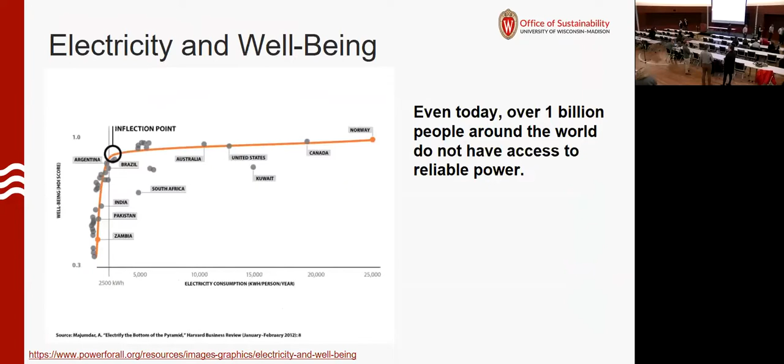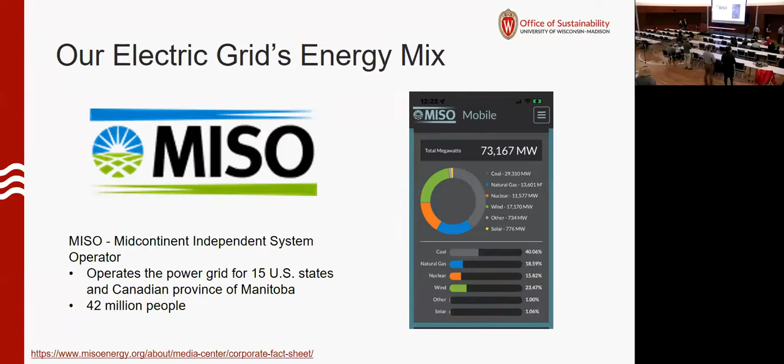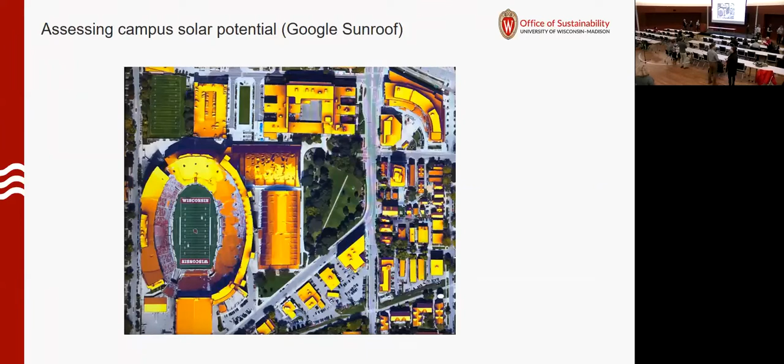Well, Andy's going to be at the panel the whole time after the initial presentation. You're welcome to join, Amanda. I need a refreshment.

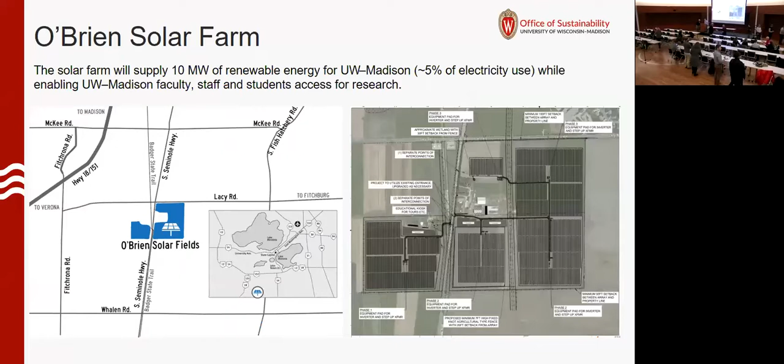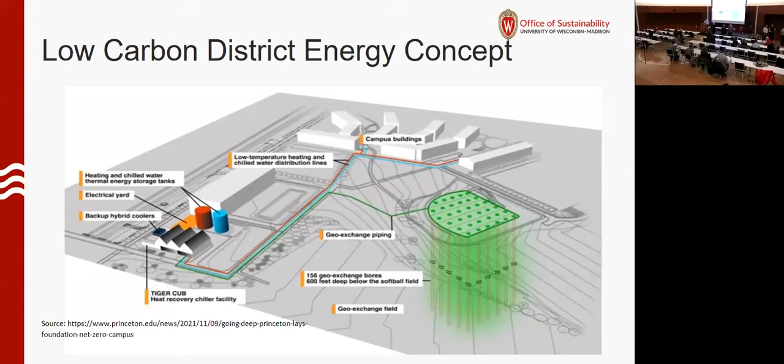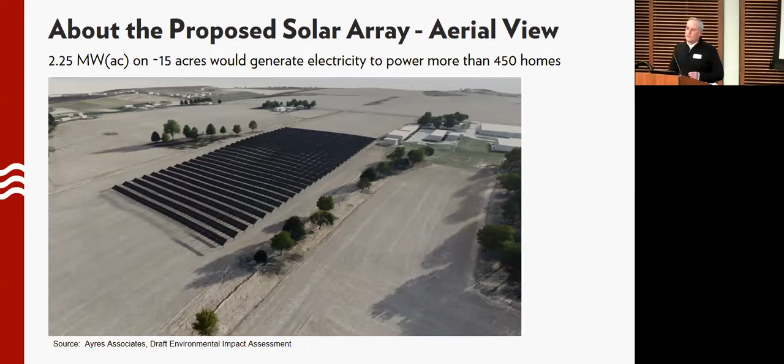The description or the image that you see here is really just the base case for this project. It's designed to illustrate the size and scope of the project, but what's missing and what we're hoping to elicit from you all here in person and listening on Zoom is how we might consider opportunities to design this array to facilitate all of the wonderful research that Professor Michael Ferris and Vice Chancellor Steve Ackerman were talking about before. So that's our mission for today. We'll share a little bit about the project and then open it up for your input and for discussion on what might be possible for this project.

As I mentioned, this project would be on the UW-Kegonsa Research Campus, and that's part of a campus that includes 280 acres altogether, including the Physical Sciences Lab. I want to send a shout out to all the folks at the Physical Sciences Lab who've been incredibly cooperative partners in conceiving this idea.

I mentioned that there would be roughly 15 acres or so that we might have to work with for this project. And the university, under this proposed project, would be leasing the land to Alliant Energy. The university would retain the renewable energy credits associated with this project.

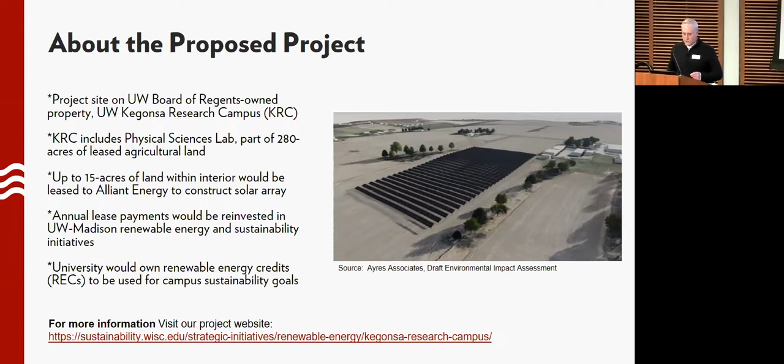And some of the outcomes that we're hoping to get out of this project: of course, we want to support our institutional mission, creating research, education, and learning opportunities. We want to make progress towards our clean energy and sustainability goals. We track those goals through STARS, the Sustainability Tracking Assessment and Rating System. Campus currently has a STARS Silver rating, and over time we aspire to continue to evolve that rating, eventually get to gold and even platinum. Solar and renewable energy projects are one way that we can help do that.

Of course, for some of our collaborators, Alliant Energy, this contributes towards their clean energy blueprint goals. And we have a representative from Alliant Energy to speak about that later on in the presentation.

It was also critical for us to make sure that we were being a good neighbor and a good partner with our local community. And that meant being in close communication with the town of Dunn and with Dane County to share information about the proposed project and to get feedback from them and learn about any of their concerns. Gary Brown will talk a little bit more about that later on in the presentation.

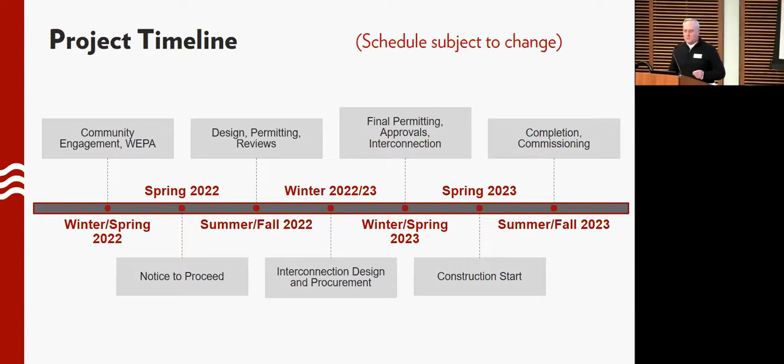We'll see how that goes. There's a lot of disruptions right now in the supply chain and other things out there that could easily throw a wrench in this timeline, but that's what we're aspiring to do right now.

I want to take a moment to recognize and thank all the people that have made a significant contribution to making a project like this happen. The university hasn't developed a solar project like this one before, and so working together has required putting new areas of communication together where they didn't previously exist.

I would like to thank all the offices on this slide, particularly the Office of Space Management, who've been critical in putting the documents together for preparing the lease. Of course, Alliant Energy, you'll be hearing from later on. Sunvest Solar, you'll also be hearing from later in the presentation. And the Wisconsin Institute for Discovery, thank you, Professor Ferris. And of course the Vice Chancellor for Research and Graduate Education, thank you, Vice Chancellor Ackerman, and all the folks from your office. But none of this would be possible without our next speaker.

Gary Brown is the Director of Campus Planning and Landscape Architecture, and it was working with Gary and his team, working with Gary's leadership, that really made this project go from an idea to the possibility of being implemented. So let me introduce Gary, and he'll tell us more about the project.

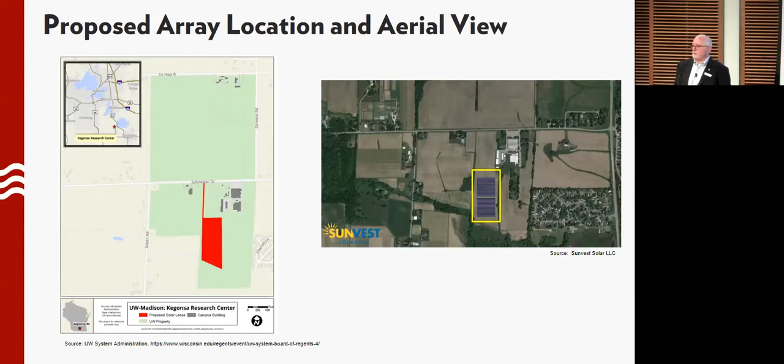There's some prime agricultural lands on the north end, but because of my knowledge and understanding of the geology of this site, just to the east is actually a drumlin left by one of the glaciers that came through here. So it's a little more rocky, a little more sandy, probably not something you'd use for agricultural lands. This south-facing slope also has some of those same characteristics. Even though it's already being used for agricultural properties, it's not one of the prime agricultural land sites that we have. It's also outside of wetlands, and we'll take a look at that in a second.

So this environmental impact assessment that we do, we spend time thinking about what the impacts could be. We actually have a scoping meeting where we meet with the public to understand what concerns they have about this type of project on this land. We heard some concerns about impacts to prime agricultural lands, but we also heard impacts from a visual standpoint.

Was there going to be noise? Were there impacts from adding additional power lines? But mostly it was about the visual impact, and that's not uncommon. We typically have to deal with that on many of our projects, but we also did some of these renderings that you've seen to help people understand what those view sheds would be like and how things would be changing.

On the prime ag side of it, we're really excited about this agrovoltaics process and understanding how we can do research out there. We're not just putting a bunch of solar panels out in a farm field—it really is about integrating the university's mission of research, teaching, and outreach into this particular array. We think this will actually help set a standard for future solar arrays across the state of Wisconsin, as many communities think about how to integrate solar panels into their areas.

So we spent time with our environmental impact assessment. We did have a couple of public meetings related to that, and it was published locally in the papers, so take a look at it. Some of the things we found is that there actually are not significant impacts in this overall development. Are there impacts? Yes, but they're not really rising to the level of significance where it would be a problem, where we would have to rethink the particular site of this project.

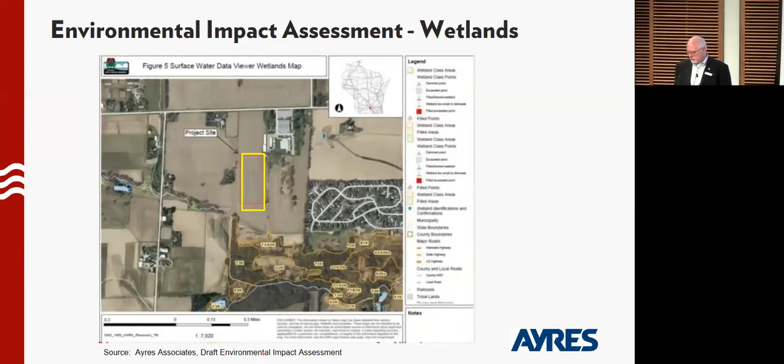Again, here's the location. This talks a little bit about archaeological sites, another thing we have to look at with project sites like this. There are no known archaeological sites in this area. There are sites to the east along the western shores of Lake Kegonsa, where we know there were Native nations living and had habitation sites. I'm not sure about mounds, but there were definitely habitation sites along that western shore of Lake Kegonsa.

But in our particular area, because it has been farmed for many, many decades, we also did some looking at the research papers and documentation you see here. To the west and to the south, there are some archaeological sites around, so as we continue our development, we'll be watching for that. As we do some of our construction work, we'll be watching for any potential resources that might show up in the overall process. But for now, we're pretty sure there are no known archaeological resources in this part of the area.

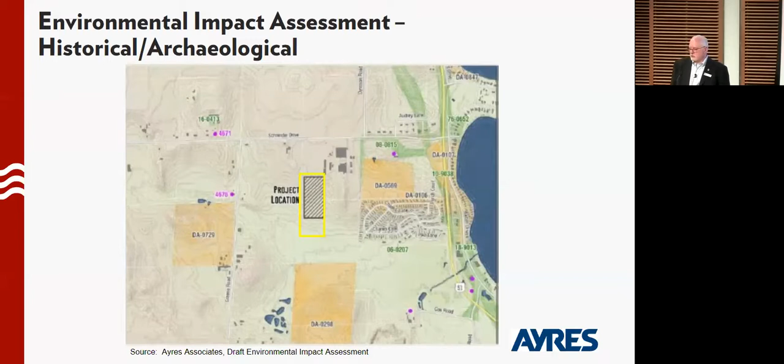We also look at how do we connect this system. You can put a solar array in the middle of a field like this, but you also have to connect it to the grid. So how is Alliant going to do that, and what was the route? What we've been talking about is connecting to existing power lines and poles, so we're not adding a bunch of infrastructure. The connection point from the array, coming down Schneider Drive, would be underground, then connect to the above-ground poles going north to a substation a couple miles north of this, which connects into the overall system and reduces our overall impacts.

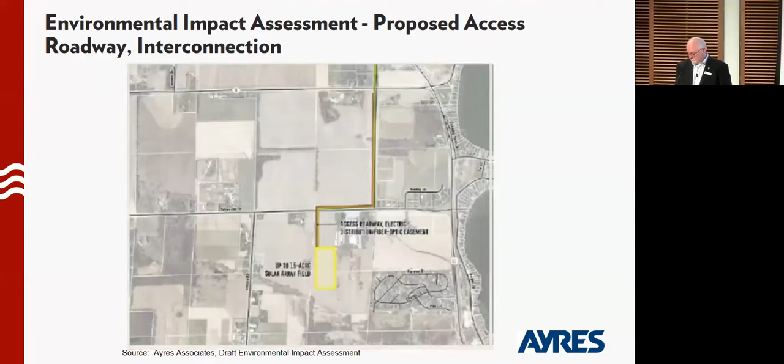So next up, we have folks from Alliant. I'm going to have them share more of the details. Josh, who's doing that? All right, Andy.

I'm gonna have to turn my mic on. Gary, you're very tall.

As many of you know, this is not a good day for a solar field trip, that's for sure. So thank you everybody for having us here. My name is Andy Ehlert. I'm a resource development project manager with Alliant Energy, and I've been working with Josh Arnold and the team at UW to put this project together.

As many of you know, UW has significant sustainability goals, and so does Alliant Energy. One of them comes from our main reliability goal, stemming from our clean energy blueprint. Before I begin, I want to thank a couple people from Alliant Energy here today. We could not have done this project without the help of Dana Halverson, our environmental coordinator for this project, and Amanda Thomas, one of our generation engineers who will be our construction project manager.

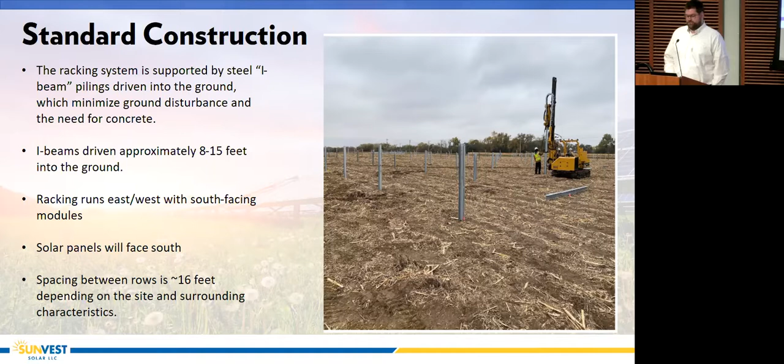Oh, well, I guess I covered these things quickly. I'm just going to make sure I can move us along here. I think that's my portion of the slide, so I'll turn it back over to Josh. Thanks.